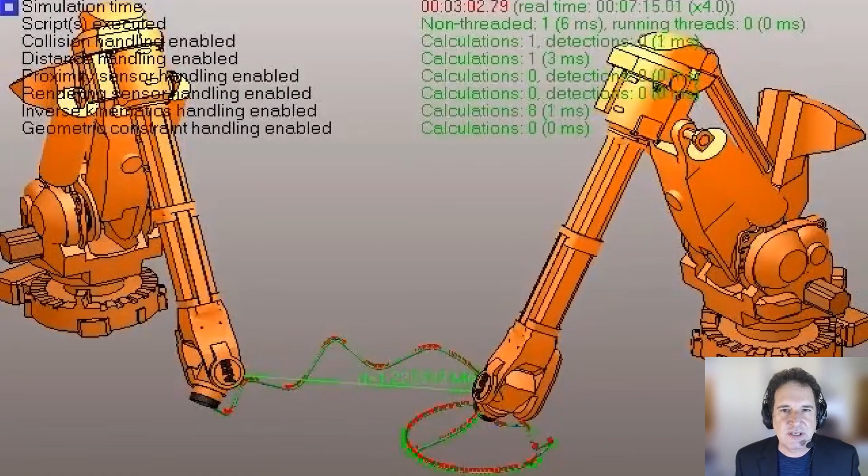Robots also have a self-image. In fact, we don't call it a self-image when it comes to robotics—we call it a simulation, or a kinematic, a forward kinematic model. These are technical terms, but they have the same purpose: they allow the robot to plan virtually rather than physically. Robots plan motion virtually using their kinematic models.

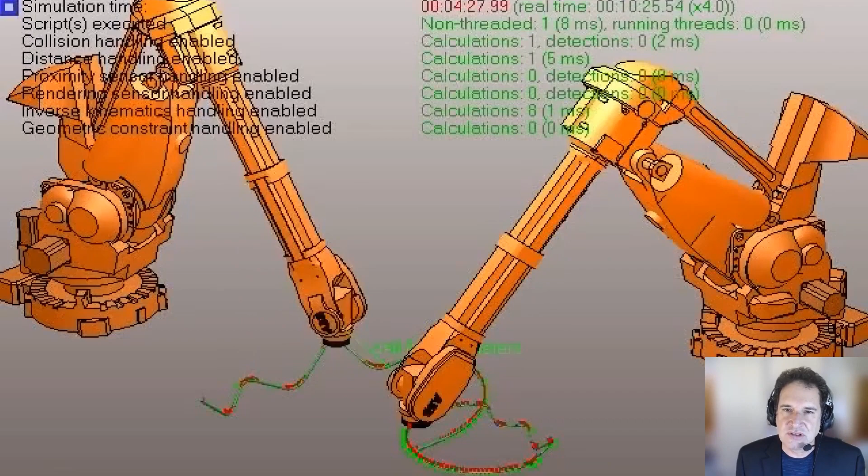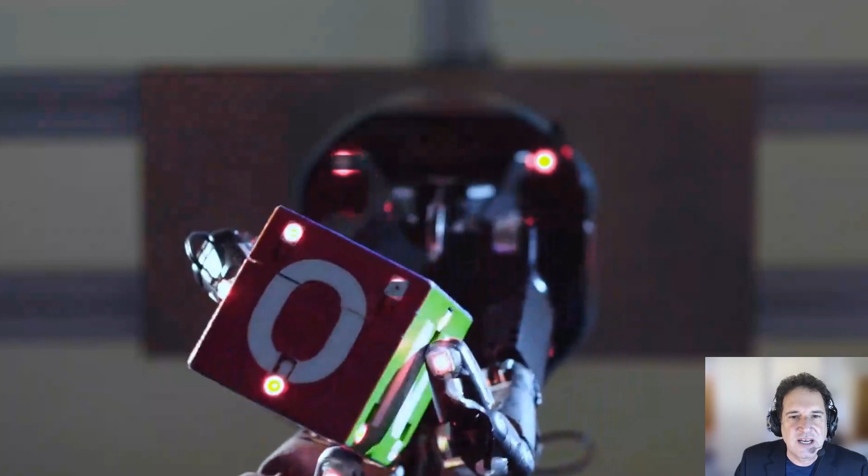If you're using artificial intelligence, the robot typically learns in a virtual world, in simulation, before it learns in physical reality. In fact, I would say most amazing results we see robots doing over time have been accomplished in simulation first. So a big question is, where does that simulation come from?

In traditional robotics, these simulations, these kinematic models, come from an engineer who provides analytical equations or CAD models to the robot so it can do planning. In this paper, we explored an alternative approach: the robot creates its own self-simulation, its own mental image of what it's like and how it moves.

We put a robot inside a circle of 5 streaming cameras that stream images back into the robot. The robot undulates inside that circle of cameras, very much like a child moving around in a hall of mirrors, looking at itself. As it moves around, it begins to get all that feedback about how it looks.

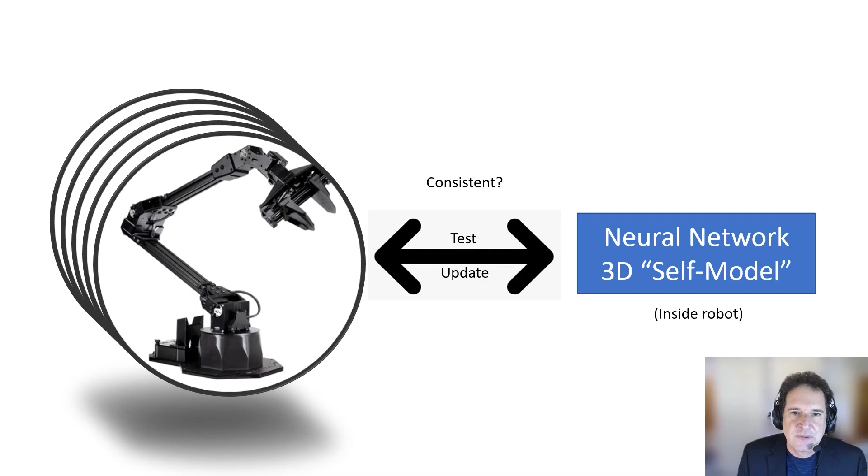The robot takes all this information, all these images, and begins to form a self-image, captured as a big, deep neural network. That neural network in the beginning is all over the place—it sort of believes the robot is everywhere and nowhere all at the same time, but that model is inconsistent with the images. So gradually it goes back and forth, testing the model against the images, removing parts that don't appear and adding parts that do, for about 3 hours until it gets something that looks pretty good.

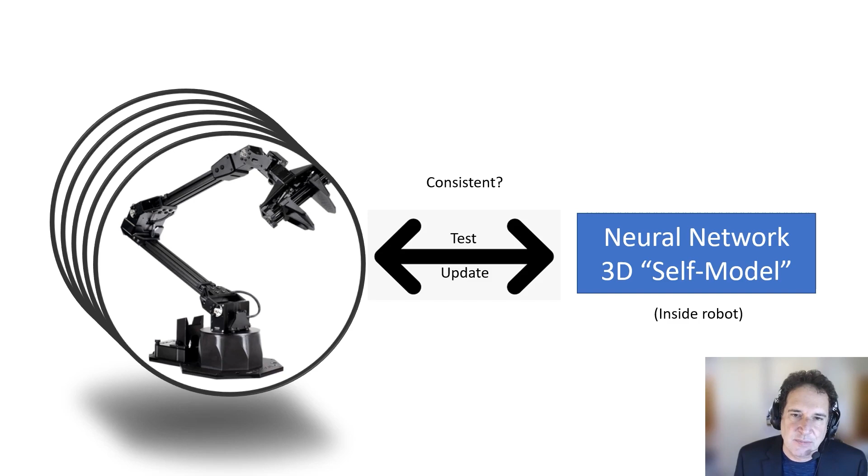Here you can see in the beginning, the black robot in the foreground, and that fuzzy thing in the background—in the beginning, it's all over the place. Over time, it gradually shrinks like a shrink wrap and narrows down over the robot itself.

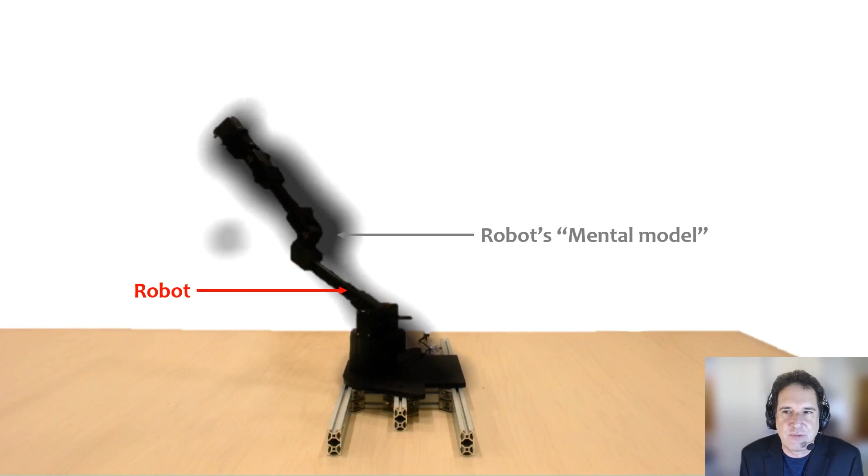Now, once the robot has this model, it can do useful things with it. Here, for example, we asked the robot to try to touch that red sphere while avoiding the red box. You can see the robot contorts, trying to minimize the distance to the sphere while maximizing the distance from the box. Without knowing anything about its own kinematics, it manages to do that pretty nicely.

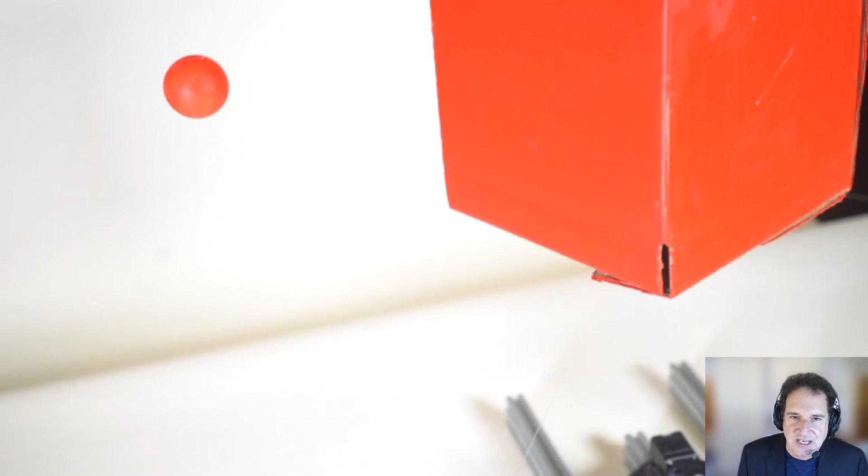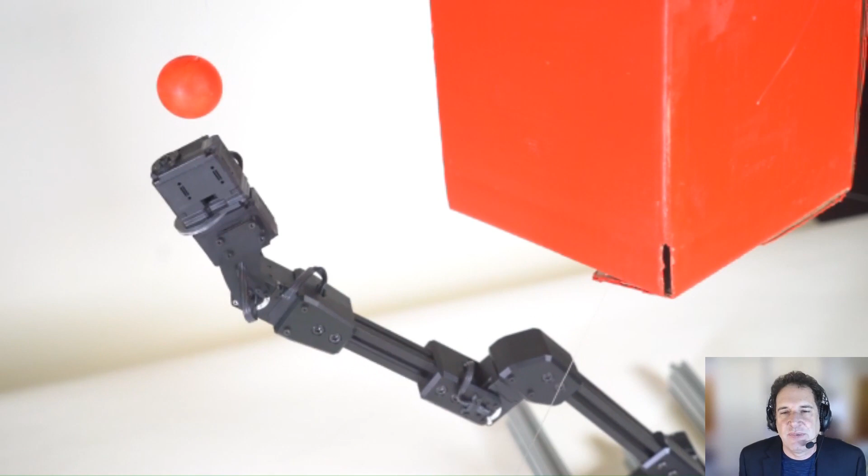Here it is doing that again from a different point of view. You can see how it's contorting, trying to get that sphere without touching the box—again, without being given anything about its own kinematics and morphology, as is done in typical robotic systems. In the paper, we explore lots of different ways the robot can move and all kinds of tasks it can do with the self-image it developed.

We also measured the accuracy, and it turns out that the accuracy of that self-model is about 1% of the workspace. That's more or less the same accuracy that we humans have in seeing ourselves.

If you close your eyes and try to reach to grab a cup of water, you're kind of going to miss by about 1% of your body size. And that's more or less what the robot does.

We also tested to see if that self-image the robot has of itself changes as the motors flex. You can see as the joint motors flex, contract, expand, and rotate, the self-image also changes. In other words, the self-model is kinematic. It's not just a static model, it's a kinematic model, which means the robot can use it for all kinds of motion planning as well.

I want to put this into context with history. Robots have been out there for decades, and they always had some ability to model and simulate themselves and plan. So how was that done in the past? For most of robotic history, it's been done using analytical models. Some engineer wrote down equations that describe how the robot moves, or at least how the end effector, the robot hand, the gripper, or the foot, changes over time as a function of the motor's command.

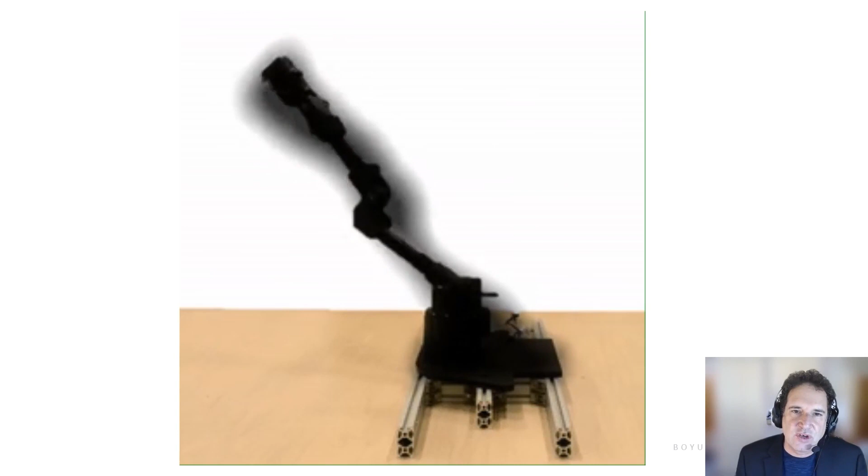So can we do that? This is what we did, and you can see here what that looks like. After it converges, that model is not 100% accurate, but it is wrapped around the robot pretty nicely. The way we did that is using a slightly different architecture.

Instead of input-output, this is a query-based model where you give it the joint angles and ask it: am I occupying this portion of space, or that portion of space? And the model says yes or no, or gives a probability. That probabilistic way of thinking about what portion of the space around you you're occupying is a much broader and more useful model. I think it's a bit closer to the way we humans see ourselves.

I want to end with a little context. As some of you may know, I'm really passionate about the question of robot self-awareness, consciousness, sentience—can robots understand what they are? I'm driven by the fact that most science fiction movies with robots always have self-aware robots. These robots can be happy, they can be bad, they can be sad.

They have emotions, and they're always self-aware. In contrast, we don't have a lot of information about what self-awareness really is. What is it in humans that makes us self-aware? I've looked at lots of books in cognitive science and psychology, and there's not a lot of answers into what makes for self-awareness, and certainly not how we can build it. So our approach in the lab is to try to build it mechanically inside a robot.

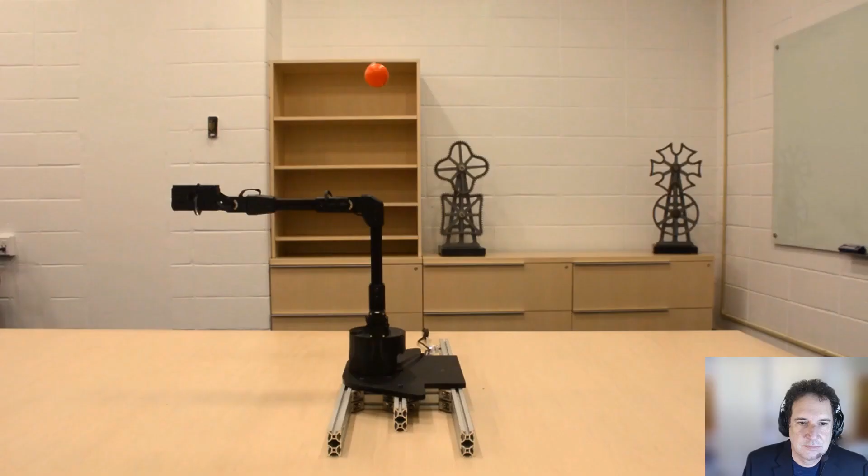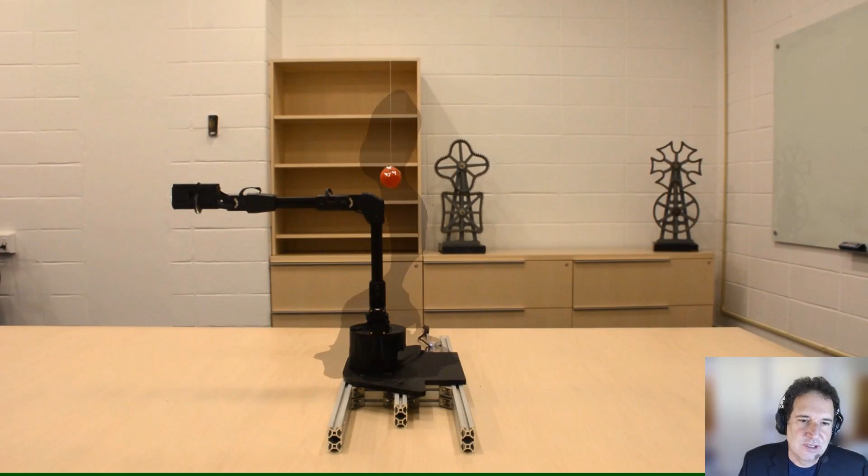And that is exactly what the robot is doing here. You can see it's first imagining how it's going to reach that red sphere, and then it executes the commands to actually instantiate that motion. So it's using its self-image to look into the future. I hope you enjoy the paper, and I'll see you next time.